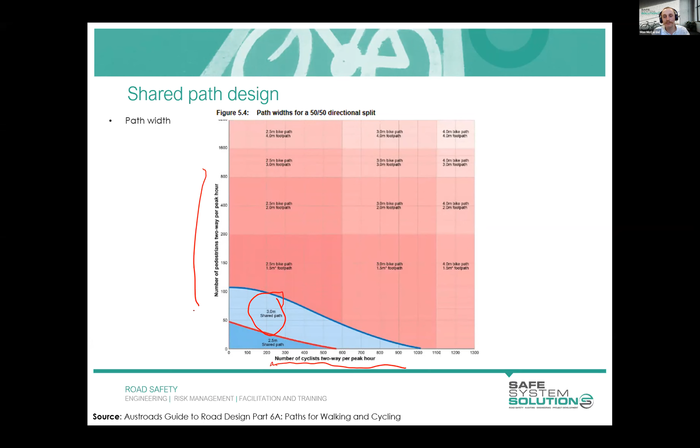So the main takeaway that I'd like everyone to get from this graph is basically, as you're increasing the number of cyclists and peds, so as both of these numbers are getting higher and you're getting higher up this chart, what you are looking at is you want to be providing separate facilities for both pedestrians and cyclists.

In other words, that image that I showed previously, that was a very good instance where you've got both high pedestrian traffic, predominantly tourists, meandering along the esplanade, and high cycling traffic. So rather than try and build one wide facility where both can kind of coexist, there's two separate facilities. So it's something to keep in mind with your projects. If you do have these high numbers, then that would be certainly worthwhile considering.

And apologies, my dog has just heard the mailman, so sorry if you can hear him bark in the background.

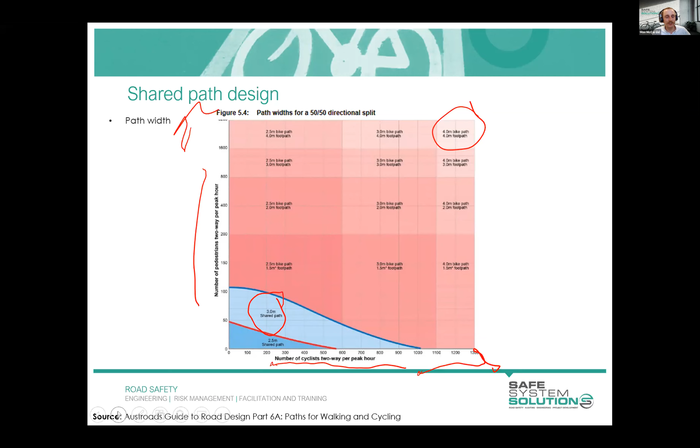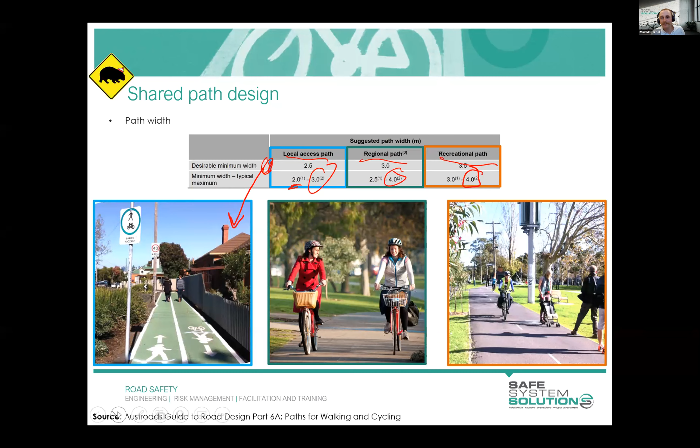I mentioned this in my little introduction on Moodle, saying that I don't do uphill gradients. I actively avoid uphill. I'm a pretty confident cyclist. I ride on the road and fairly happy merging in front of traffic if I need to, but I don't like riding uphill. I just find it exhausting, and there's other things I'd rather be doing. But for other people like Ken, our lycra-clad MAMILs, they're not as put off as me.

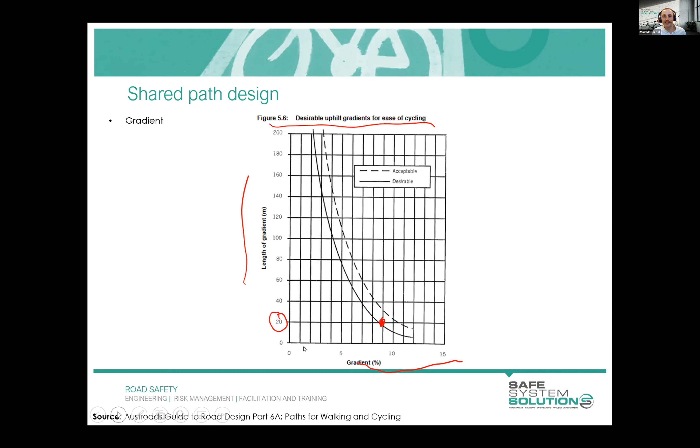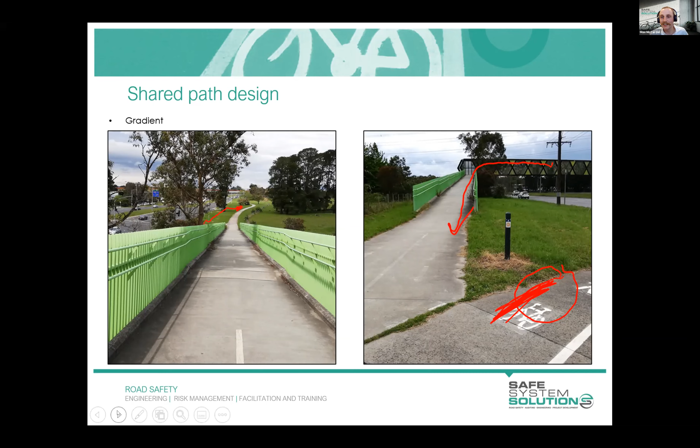So another option would be to move the shared path connection further down this alignment here. So you've got much better sight distances. You can see where cyclists or pedestrians are entering, and you've mitigated that risk in particular. So this was a road safety audit that we actually completed on this particular project, and that was the recommendation that we made. And luckily, it was accepted by the project team, and that's actually already been installed. I don't have a photo of it, but yes. Another reason why gradients are something to consider as part of your shared path design.

When we look at hazards for cyclists, we need to consider our cyclist envelope. So pedestrians have an envelope, wheelchair users have an envelope, heavy vehicles have an envelope, cyclists have one as well. There's a few different guidance papers out there which have slightly different values. This one's taken from the New South Wales guide, which I think is probably the best one. What's always common is a metre width, operating width of the bicycle and rider, and the head clearance, 200 mil or 0.2 meters. Some other papers say that's 500, but this is obviously a little bit more conservative.

So the reason that's so important, it's particularly relevant where shared paths go underneath underpasses and the like, and they could strike the soffit of the beam that runs above them. If you aren't providing that clearance, particularly in low light conditions where those underpasses typically don't have great lighting, you can create a risk of a cyclist striking their head. So not a great outcome.

The other things that we have within this envelope are these clearances from hazards. So we have a 0.2 minimum. That also slightly differs between papers, but that would only be considered appropriate where the hazard is something smooth, not a fixed point hazard, and something that if the cyclist were to collide with it, it's not going to make them dismount or fall off their bike. So an example of that 200 mil minimum could be cycle-friendly fencing, which I talk about later on in the slides.

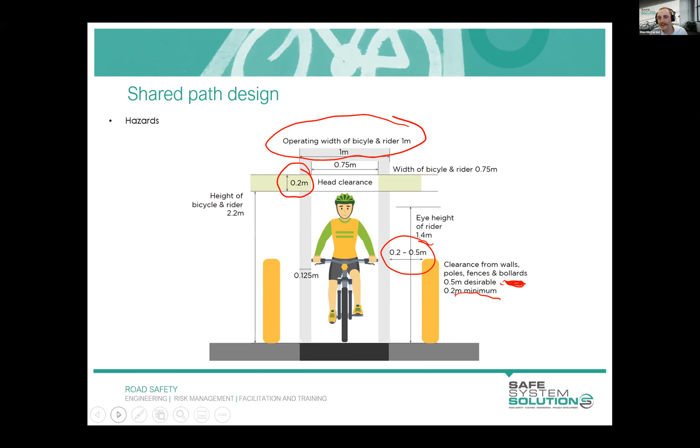So a MAMIL, apologies for those that aren't familiar, middle-aged man in lycra. So the people that get very excited on the weekend and get suited up in their lycra and then just go for it on the arterial roads, usually in groups with all their friends. And yeah, that's what a MAMIL is.

Something that I believe Ken doesn't mind enjoying on the weekends. Yes, I'll put my hand up as a MAMIL. That's okay. Thank you. That's all good.

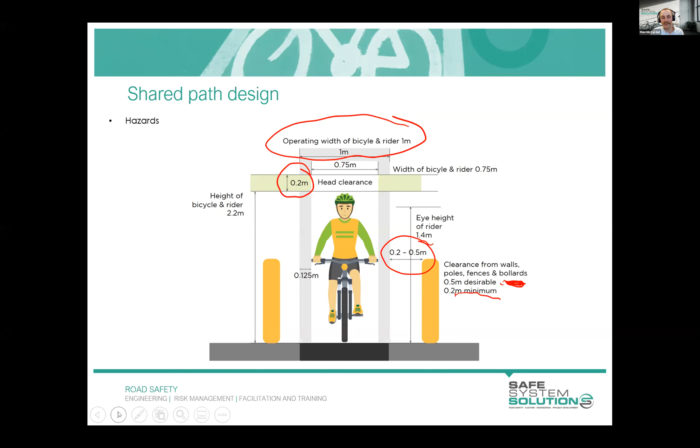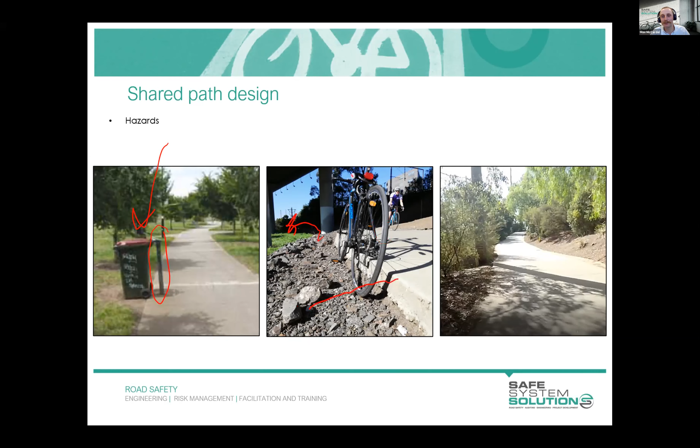The last photo I've got here, it's a little bit difficult to see. There's a utility pole that's beautifully concealed by the vegetation that's growing there. Our edge of the path is just about here. So you can see it doesn't meet that 500 mil or half a metre requirement that I was discussing before. So we could look at ways to try and improve. Ideally, in a perfect world, we would remove the hazard altogether and perhaps underground that asset or shift it further away from the edge of the shared path. However, you could also look at just improving the awareness that there is this hazard here and perhaps narrow the path at this location.

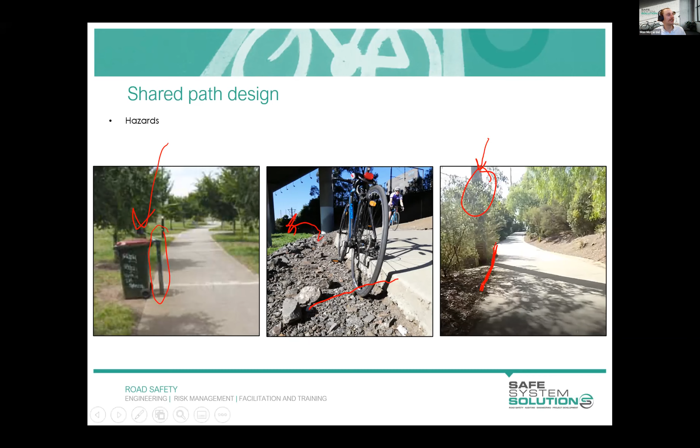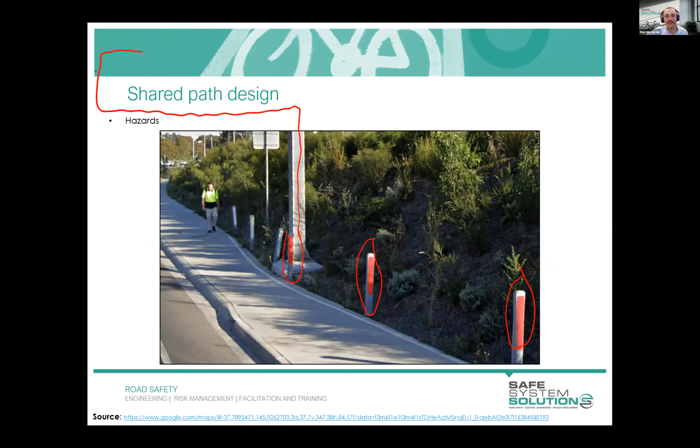I do have an example on the next slide here of how this could actually look, narrowing the path. You can see you've got these flexible bollards there that show that something's changing. You can see this gantry here. This is a gantry, and it's got a sign on it like this that goes across the road. So that's just an example of one way you can look to improve the conspicuity of the hazard, or just making sure that users within that area are aware that something's changing. There's a hazard within their space.

Once again, in an ideal world, this is a fairly recently constructed road project, and this gantry was installed maybe a year ago or so. Amazing that we didn't just consider popping it back here within the verge and maintaining our 3-metre width shared path the whole way through here. It just seemed to be a little bit of an oversight from the project team, and I'm sure that these flexible bollards were not installed as the first primary treatment throughout the design process. It was more likely picked up as an audit finding from a road safety audit that occurred post-construction, and that's kind of what's been put in place. But certainly not saying that the flexible bollards are best practice. It's just something that can be done to improve the delineation in that space.

And for those who may have noticed in the bottom of the slides, I tend to include a source, which will just point you to either the Google Maps reference, so you can click on it yourself and have a play around to see how that looks, or it does mention which particular guidance document that comes out of. Sometimes the same figure is used in many different guidance documents, so it might meet many different parts.

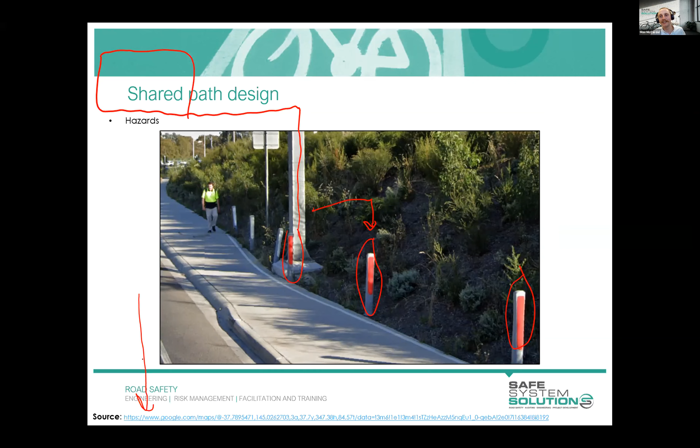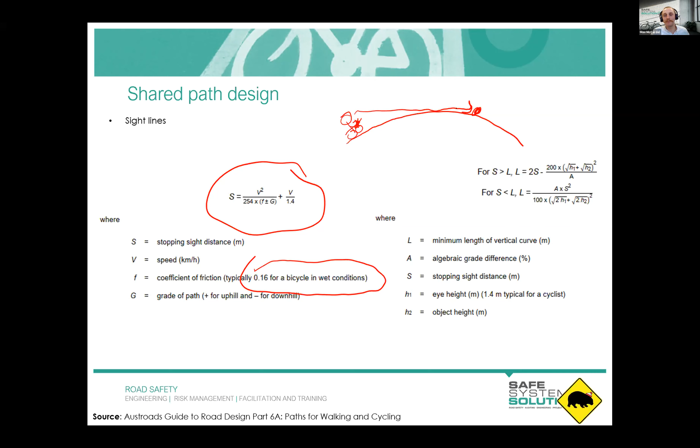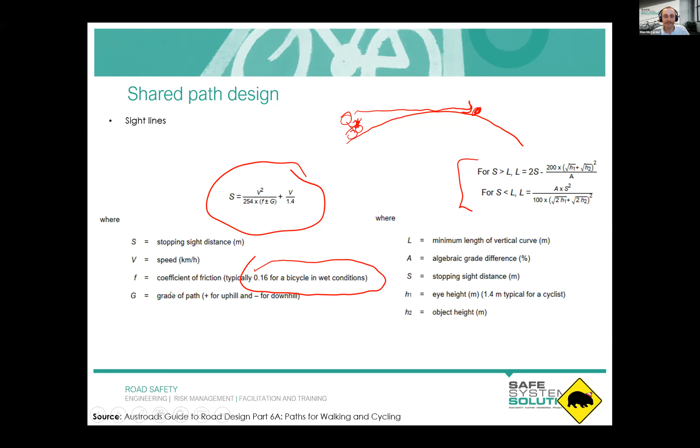This is actually a calculation that can ensure that you're meeting those requirements. So once again, probably not relevant to everyone here, but just wanted to satisfy those that do like to get into these calculations. So here is just an example of if you did want to apply those calculations.

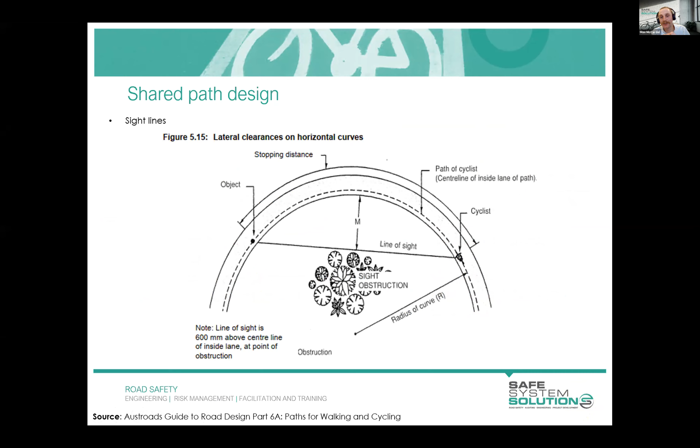And what that would actually mean in practice, it would mean that you wouldn't have landscaping here that would grow so big, or something that kind of grows like this instead, or not having landscaping so close to the edge of the radius of the path. Things like that you could consider. So that's just an example of how that sightline calculation could actually be used in practice in the real world.

Okay, what have we got next? We'll talk fencing. So fencing for cyclists in itself can be a hazard. It's just bewildering how often we see fences that are adjacent a shared path that are not cycle-friendly fences. I'll show you what that means in a couple slides if you haven't heard that. But there are actual criteria to meet where you would put in a fence for a cyclist.

And there's two types of fences that are generally considered. One of them is called a partial barrier fence. The other is a full barrier fence. Consider it like partial is, there's a hazard behind here that we need to protect errant cyclists. However, it's a medium risk. A full barrier fence is, there's a significant risk behind here. We need to fully contain errant cyclists. So it's kind of a tiered approach. Partial being medium risk, full barrier, very high risk.

How this is actually calculated, it's all dependent on how far away the hazard is from the edge of the path. And also, in this instance, it's stating what's that drop off that you're considering there. So that Y value is how far could the cyclist potentially fall. So you can see for a full barrier fence requirement, if the X, which is how far away it is from the edge of the shared path, is less than 5 meters and the drop off is greater than 2 meters, so basically you've got a cliff there, that's when you need a full barrier fence.

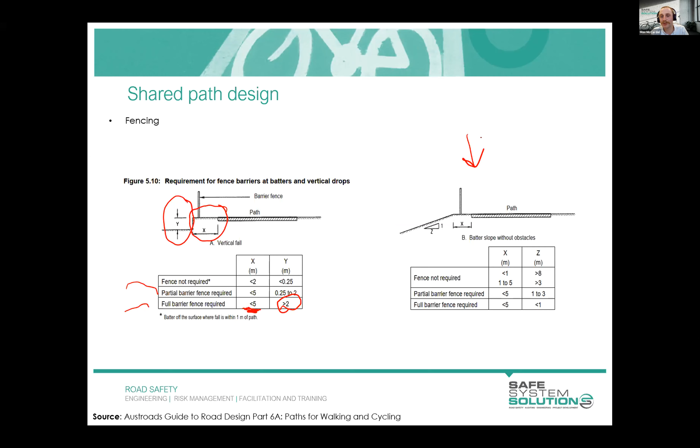For some that work within batters, I'm sure this all looks fairly familiar to you, when to provide it and not, using the 1 to Z or the 1 to 5, 1 to 10 batter slope requirements. But for those that haven't seen that, all it's saying is, depending on how flat the adjacent area is to the shared path, that determines whether or not you need a fence there. So if it's a gradient like that, you're riding against something that's very, very steep, that's when you need to put a fence in. If it's flat, then you can just leave it as is.

The thing that I wanted to really emphasize, what makes these shared path fences cyclist friendly, is if we look at traditional fences which just have posts and then beams that run across it, like a chain mesh fence, there's a significant risk of handlebars snagging against the posts or within the chain mesh fence, and then that would result in a cyclist coming off their bike

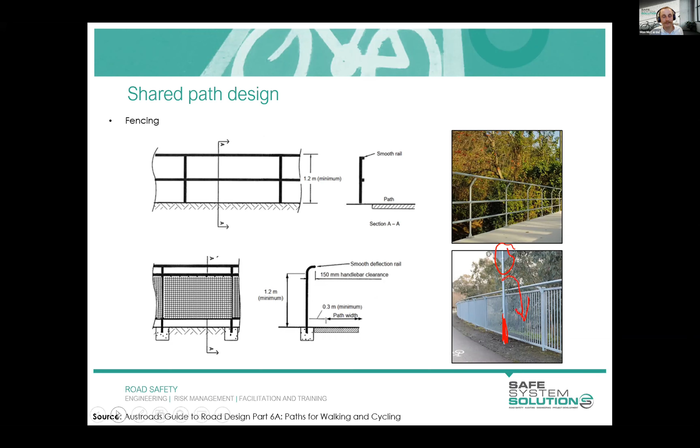So here's just another graphic. This was from Transport for New South Wales. And I just wanted to mention also that low fences can be a risk or a hazard for cyclists as well, as they can actually strike at the pedal level and also create a destabilizing effect.

Ken, how are we going? Yeah, good. The questions come in. So if X is greater than 5, does it mean no barrier required for any value for Y, any drop-off value?

Sorry, I've just lost my audio. Oh, okay, we can still hear you. Not sure you've lost us. Can you hear us now? Yes, I can hear you. Sorry about that. No, that's all right.

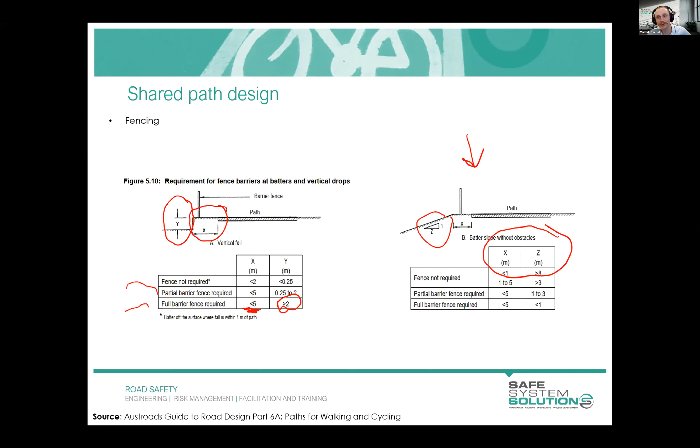So the question was around the lateral offset. X is greater than 5. Does that mean no barrier required for any Y value, any drop value? So for X, I've got less than 5 here, sorry. So if X is greater than 5, then that is what it's suggesting. And once again, take that with a pinch of salt, because even if a cyclist may not run out further than 5 meters, you could have pedestrians that just use that area as a picnic. And if you've got a 2 meter drop, you would think you'd want to be fencing that off. So take those figures with a grain of salt. Yeah, but that's what those figures are theoretically saying. Yeah.

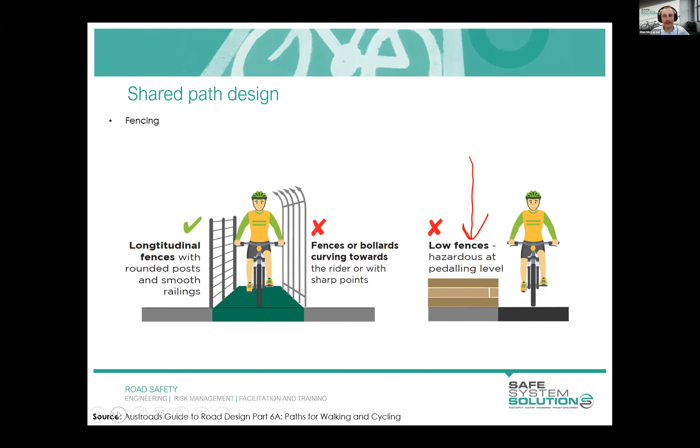Thanks. Oh, that was it? Okay, no worries. I've actually got a little activity here. So Ken, before you head off, see back.

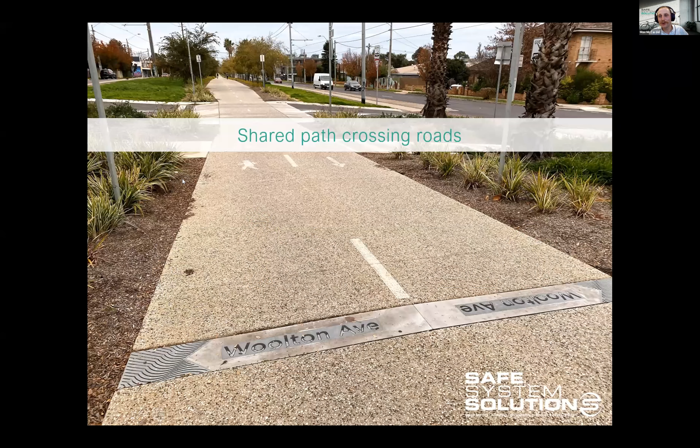Hey, would you like to launch our first poll of the day? Let's get everyone engaged. Let's get everyone excited. Okay, so poll has been launched. It should pop up on people's screen. And you're not marked on this. This is not your official quizzes and the like.

But we've got there, should fencing be installed along the shared path? This shared path, I believe you're talking about. That's correct. Yeah, so I just moved that little banner out of the way so you can see it a bit clearer, but I'll do a little drawing of what I'm talking about. Should we have a fence kind of like this along here? Obviously with a smooth rail to make sure that it's cycle friendly. Same on the other side. What does everyone think? Should fencing be installed along the shared path and all the way down to the end?

So while people are having a think about that, Jason's popped in a question there. Do you have any advice on where a W-beam guardrail separates a shared path from a travel lane, constrained space? A fence would be needed, but may introduce a spearing hazard for cars. And I think that's a really excellent bit of thinking there. Did you want to comment on that first, Max? I do. And my first comment is I think we can give Jason a prize because that's a really pertinent question. A few factors that I'd consider.

So for those that are just trying to picture how that would look, if you've got a shared path with a guardrail system that separates the shared path from the road activity adjacent, the posts in particular I'd be very concerned about for cyclists, as they would most likely be very close to the edge of the shared path, if not actually on the shared path. And if a cyclist were to collide with them, they'd come off the bicycle for sure. And if they were to actually hit that blunt steel object, the trauma associated with that would be relatively severe compared to just running off onto this vegetation that I've shown over here. So that would certainly be an issue.

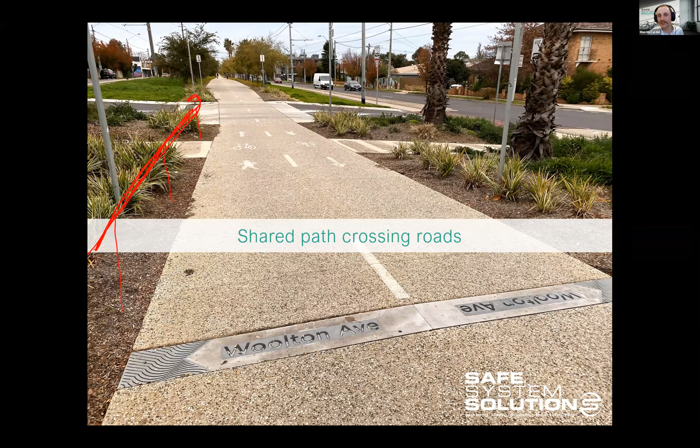Most people are going with no. Yes, okay, that's good to see. And I would tend to agree that no is probably the answer I would side with as well. For those that did say yes, sorry about that, it is reasonable to say that, just perhaps looking at the signposts and how close these are actually offset from the edge of the shared path. Looks like it comes in fairly close to that location as well.

A few things that you need to consider with providing the fencing as well: just amenity, the attractiveness of the facility. If you're then blocking off all the vegetation and blocking off that green corridor, that's also going to affect the attractiveness of riding through there. So generally, I agree that we probably wouldn't require cycle-friendly fencing there.

Also, just as an aside, if the cyclists were to come off, they're riding into grass, vegetation. If they fall into that, probably not such a severe outcome. So something else to consider as to what that crash outcome would be.

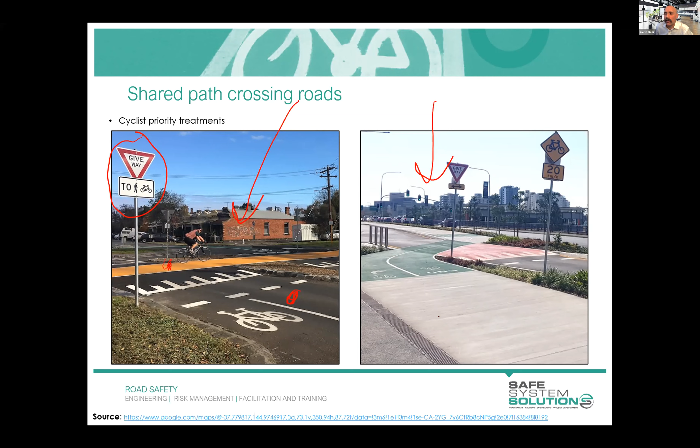We've already got a quick answer in there from Duncan, which is good. Let's give it a little second here. Oh, good stuff coming in. So we've got, straight off the bat, Duncan's not happy with the angle and the ability to have vision at that angle. We've got some issues with signage and clarity, color confusion, a little confusing at first glance. Who has priority is a question there.

Give way sign is ambiguous. It's hard for the cyclist to look behind. Conflict with peds, the angle, and around a corner. Bollards are a hazard. Wow. Jeez. Who does the speed limit apply to? There's an interesting extra comment. Okay, what did you think there, Max?

I certainly agree with all of them, and that bollards pickup was spot on. To be honest, I didn't even notice them there. So I think a prize out to the bollards comment there, Ken. But the comment in particular that I had in my mind probably goes to Duncan, and he was straight off the bat. Just this angle of approach.

You could imagine if you're cycling at speed and you want to cross over at this location, your ability to turn right round and sight oncoming traffic at this service road is pretty limited, particularly as a cyclist. You want to maintain your speed. You don't particularly want to be slowing down, particularly at locations where you have the priority. So you'd almost, with a false sense of confidence, head through there and hope that you'd be okay. And that is obviously not such a good approach within our cycling network.

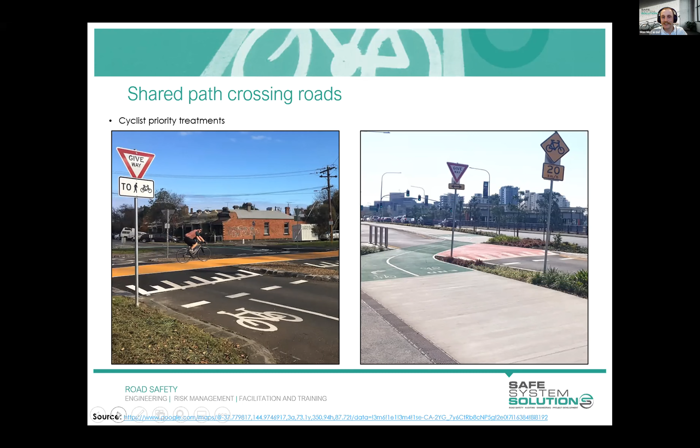Speaking of bollards, that was a beautiful segue. So thank you, Penny.

Certainly a significant hazard to cyclists, and I fully appreciate those that perhaps don't cycle and just walk past these on a daily basis and don't see the issue with them, or don't see how that could be a hazard for cyclists. And I'll get to that in a few slides, but just wanted to really highlight that there is such an array of different treatments for bollards.

Sorry, I get pretty passionate about my bollards.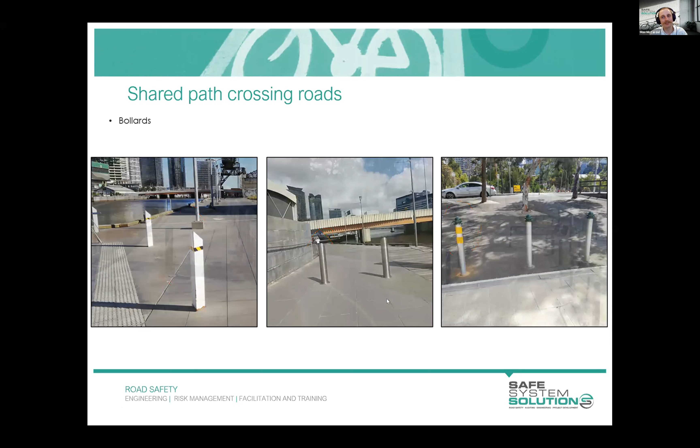My main principles for bollards, and this may seem a little bit silly, but is it actually required? Because of the number of bollards that you see, particularly in metropolitan areas where there's no possible way a vehicle could actually enter this, general traffic I'm talking about. The reason that bollard actually exists on the shared path is to prevent maintenance vehicles or rubbish vehicles or anything like that. When they go to pick up or do any work within that area, there's a bollard there so they can't go any further.

I would question if it's not more advantageous for cyclist safety to have a conversation with the groups that do those services to not enter the shared path, or to provide other means to restrict their access rather than putting these actual bollards. So that's my first principle. Is it actually required? The second principle is, as I said before, making it as obvious as possible. It can't be blending in with the background. It needs to be retroreflective.

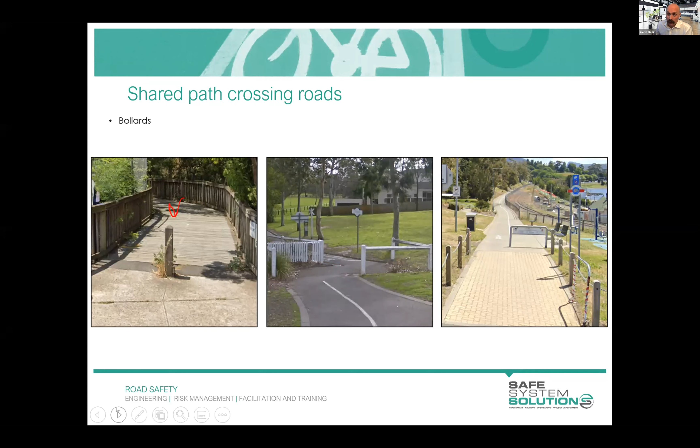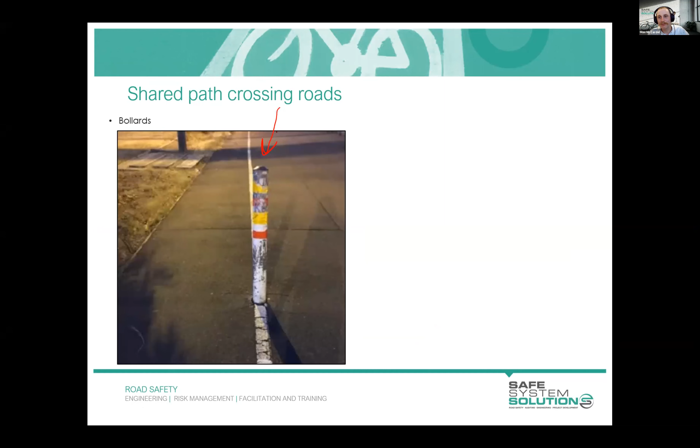I'll share this next slide, and this is just another example. I swear I'll move on from bollards soon, but this one, as you can see, is not in the best condition here. It's blending in quite well with the white continuous stripe behind it. And this fellow here was unfortunate enough to actually strike it. The reason I included it in this slide is because I just wanted to mention what happened to this fellow. He suffered 3 broken bones in his wrist and facial injuries when he collided with this bollard.

This is a very, very popular commuter cyclist route here in Melbourne. And incredibly, while waiting for the ambulance to arrive, 2 other cyclists hit the same bollard, and they just had minor injuries. But in such a short period of time, and we do know that not all cyclist crashes are recorded, particularly if they're not on the road network. So in just that short period of time, you had 3 cyclists hit the same bollard, and that's what it looked like. Council then went out after this news story kind of broke. They went out there, they sprayed the bollard, put some new tape on it, and thought that's the answer to it.

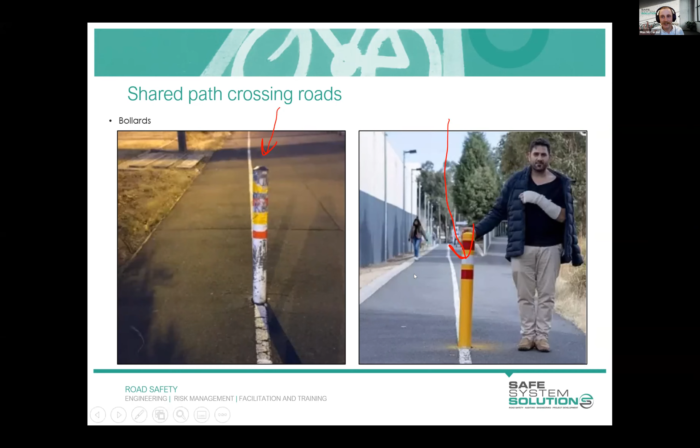But yes, just wanted to highlight that it's not just an annoyance or a grievance of cyclists, it is a genuine hazard. And if you've got a cyclist that's in front of you, if you're on a commuter path, they might block the sight line. So you may not actually see the bollard. You then go to overtake them, and then you've hit the bollard. So yes, it's certainly to be used with a little bit of skill, I would suggest.

Here's an example of what I would consider best practice within the bollard space, acknowledging that we do need to ensure that general traffic can't access shared paths. So this is what we've got within the Austroads guide, and it's not actually applied all that often because the bollards are just a lot easier. But we have this almost kind of splitter island setup where you separate both the opposing traffic streams for the cyclists and peds movements, and you create this central median area which you can use for landscaping. You can put in like a little luminaire. You could put in a bollard there because it's off the shared path. It's not right in the middle of the shared path.

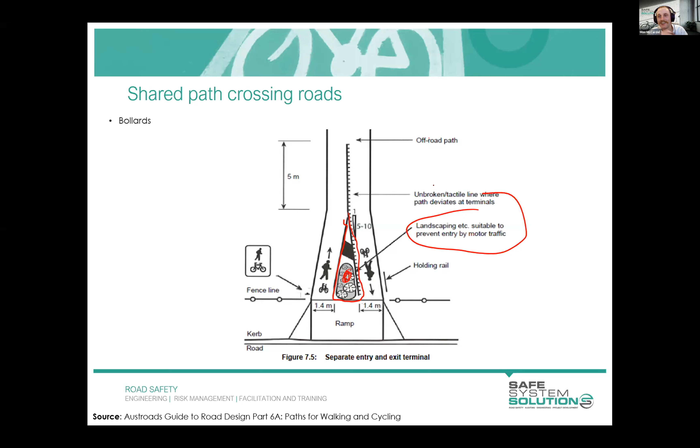And I've got an example of how this could potentially look in practice. So this is just an example here of the grassed kind of median being used. These are bollards. However, as you can see, they're not in the shared path, and they also double as lights. So they've got little luminaires on them. So they light up at night, which means you can see them in all conditions. And I think that's a much better approach to go for rather than just smacking a bollard right in the middle there and making sure no vehicle enters that bridge. So just another little best practice tip there for you guys.

When we are looking at shared paths crossing roads as well, we do need to consider our DDA requirements. So that's the Disability Discrimination Act, and it's not always applied. It's something that is probably considered a lot more frequently with curb ramps and where there are zebra crossings, wombat crossings and the like, where we are raising the crossing point, as we can see in this particular example here. So we're raising the shared path to be the priority across the minor leg. Then we do need to actually provide tactile ground surface indicators.

And for those that are not familiar with that term, those little blocks, those little pavers that sit just on approach to the road, so people with vision impairments can feel that there's a hazard coming up, the hazard being the road, and they can safely cross over when they can. Some argue that the TGSI pavement markers create a bit of an issue for cyclists. However, I consider that fairly negligible, and the risk to vision impaired people crossing the road is generally a higher risk than cyclists perhaps getting a little bit of a rumble in their handlebars as they cross over those TGSIs. So something else to consider if you are doing any of those raised treatments across minor legs.

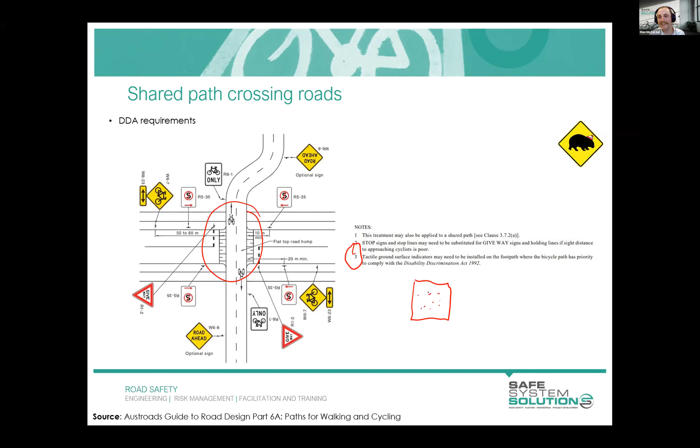I've been meaning to get like a little backing tune to do there, just like a little keyboard hit or something.

Well, they're coming in quick here, Max. Nuno, hot off the blocks there. No priority signs. Naomi asking who goes first, who gives way, no arrows, line marking is inadequate, ambiguous priority, no clarity priority, who's priority, wayfinding direction, confusing priority, who goes where, who gives way. Lots of great answers there.

And Asha said there's no bollards, just to keep you on your toes there, man. Thanks, Ash.

Lots of others there. Any you want to give a prize to there for? Yeah, certainly the ambiguous priority, whoever was the first to say that, but it sounded like everyone had the same idea there, so that's good to see.

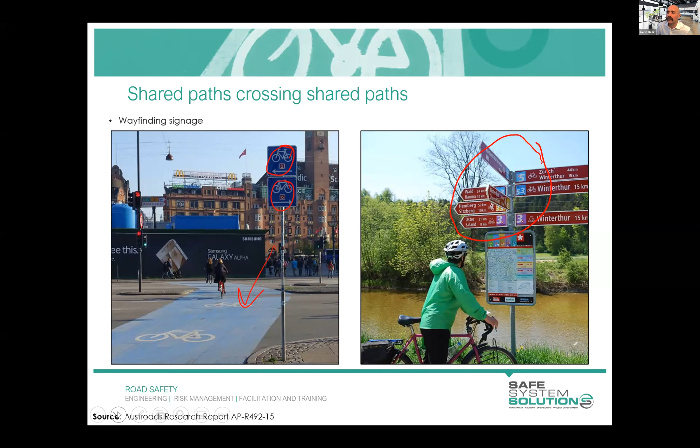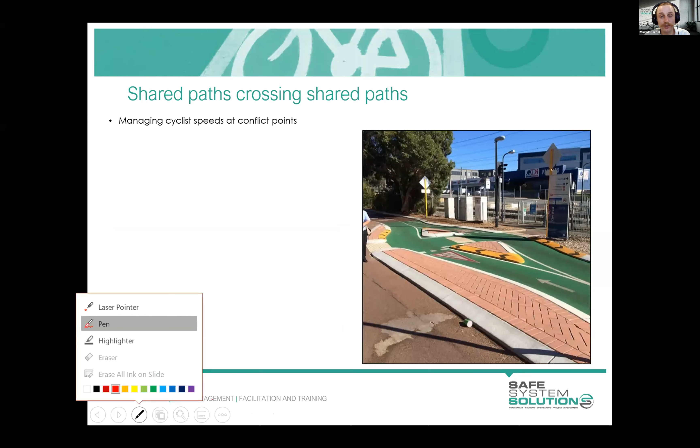Okay, so the last part that I want to discuss today is when we've got shared paths crossing shared paths, or crossing really, really busy pedestrianised areas. So this example is actually in Perth, at City West station, for those that are familiar. This is where pedestrians exit the train and cross over the rail line here. And you can imagine during peak periods, there's a whole crowd of pedestrians that cross straight over the shared path. And so what they've done in Western Australia, they've created these little splitter islands. They've done give way signage, pavement markings as well, which I suppose is another way of trying to create this kind of intersection, where there's vulnerable road users within this space and you need to slow down. It's quite an interesting approach.

And another means that you could, actually, I might just open that up to the group. Could anyone think of anything else that you could potentially do in this space where you are getting high volumes of pedestrians crossing straight over a shared path like this? So you've got cyclists going in one direction, pedestrians in the other, and you want to make it as obvious as possible that there is this conflict, and it does exist. Nothing against this particular design, but just want to explore some other ideas people may have.

Well, we've got ideas there to change the colour of the crossing, raise the crossing point. Lots of people wanting to raise that, and lots of support on the colour. Maybe make it a zebra crossing, so mark it as an actual pedestrian crossing point, and the vehicles, in being the cyclists, would give way. There's a few ideas. I love the raised crossing point. I think that's a really good one.

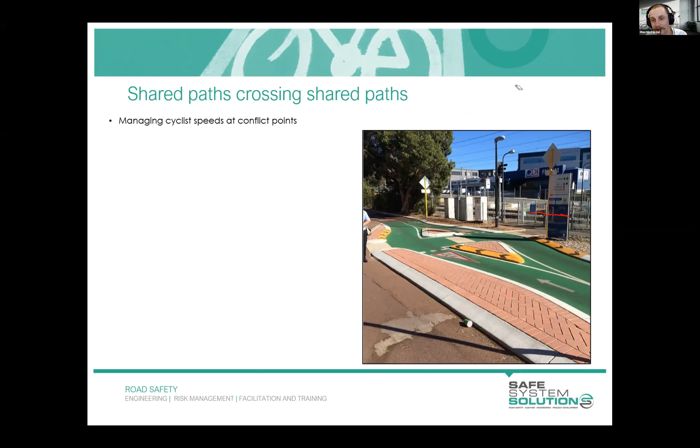Another kind of supporting or supplementary treatment. This is not the be all and end all, but just kind of providing these visual cues to cyclists that pedestrians are going to be crossing in the area, and just ensuring that cyclists are slowing down. So that is just another means of doing it.

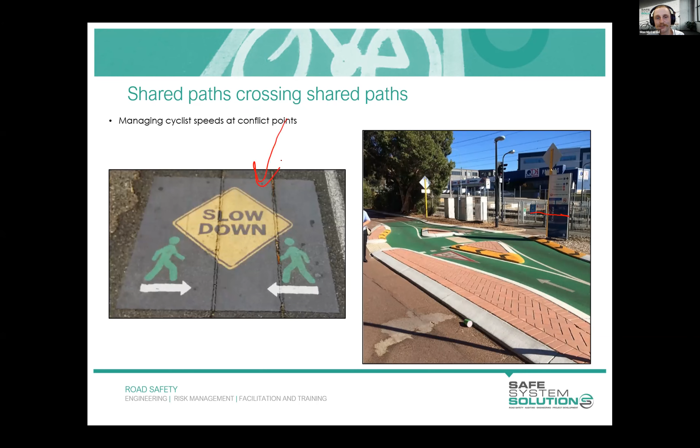That is the end of today's session, but we do have just some things to run through on Moodle. I just wanted to show, yes, this is the end of the shared path and also the end of our module, but this is an interesting way to do it, just to basically say that's the end of the extent of the project and I'm not doing anything more, and I'm going to close it off here. So that's a real example. If you click on that link, you can have a look there. And I can see why this particular project has ended the shared path here. You've got a really, really busy arterial here and a big roundabout.

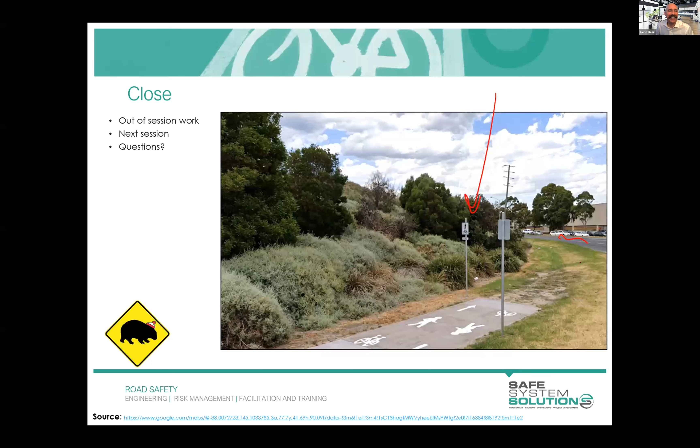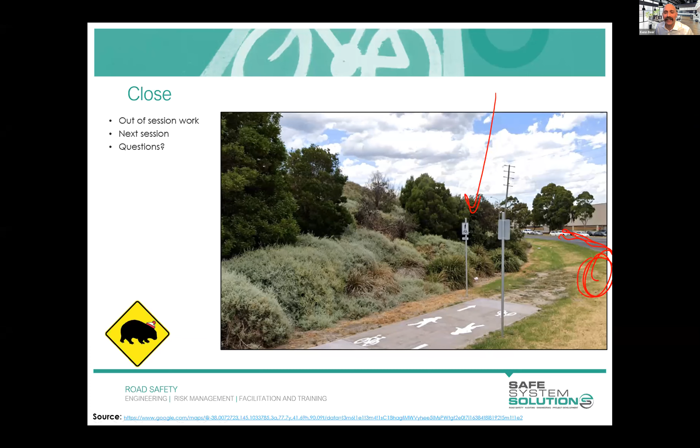All right, I think we might be losing Max again. Max has fallen off the end of the shared path, I think. And I'll just wait to get Max's screen. I'm going to steal his screen from him. That's the end of the NBN right there, says Duncan. I love it. Okay. I can still hear you. Can you hear me? Oh, got you back now, Max. Hello. Yes. That's the end of that conversation anyway. So don't know what's happening with my internet today, but I'll hand it over to you, Ken, to run through Moodle. Yeah, no worries. We lost you for a second there. I'm just going to go onto my second screen and just get Moodle up and running.